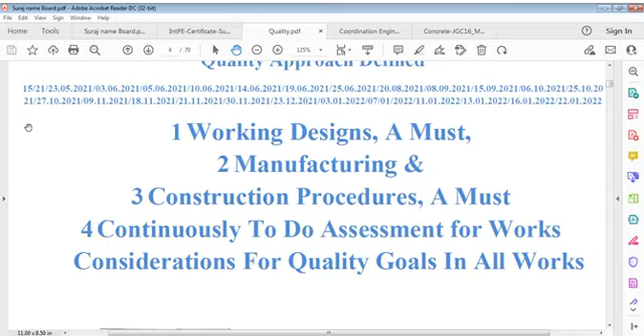You may work on designs, you work on manufacturing or construction procedures, or continuous assessment for works, consideration of quality goals in all works is a must. You cannot say no, and that's very important. We have to fix real quality in Bharat, India, come what may. No excuse for any concessions. Why excuse for concession? No, I don't need any concession.

If I am a good person, I value time, I gather information, and I concentrate on activity. If you don't concentrate on your worksheet or in MS Word or whatever, I'm talking very simply, which everybody does.

If you don't concentrate on calculations, you will miss something, and the worksheet shall give you a different answer. It usually happens - a little disturbance in concentration can lead to something. So when you work in a quality way, you have to think of that, focus on that only.

Work's quality cannot be compromised. There is no way we intend to compromise, just in the name of a fragile system. A system is always fragile because you did it - it's not solid, it's not founded like RCC. It's your own system. You say, I'm going to work this way, you prove this, and it doesn't contravene the quality system. You say, no, this is my way of working, I prove it, I do it.

It doesn't matter, that's all the system you feel, but it may fail because you have not tried it in every respect, and that's what I say. I don't want to go into details of that. So we can only say that I could not find this anywhere - existence of quality and coordination - and that's why there are all red lines, and we'll just go to the coordination file for another way, so I have to jump onto the other one, and that is the concrete file.

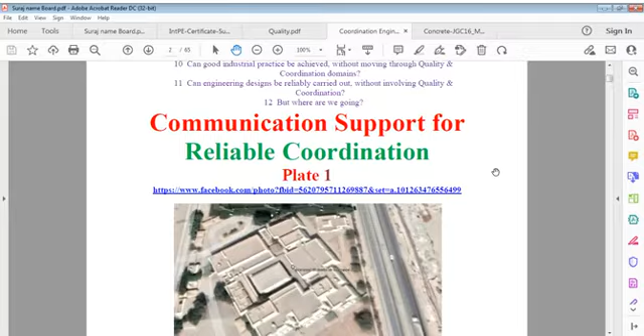So it is now real coordination I'm talking of. It is engineering projects I'm talking of, and public engineers I'm talking of. That's what is important, and we have to see how this works, how it's important. Communication support for reliable coordination - it is all that, and we have to go to specifications, and that's also a very important point we have to spend time on.

Then I'll go to another file also, and that is fabrication of reinforcement. We were talking yesterday about collapse, the system collapsed, and they're going to continue it, and we are somewhere here. Assembly of bars we did, and I think we are on formworks. We did many items of formwork, I think it is 95 somewhere.

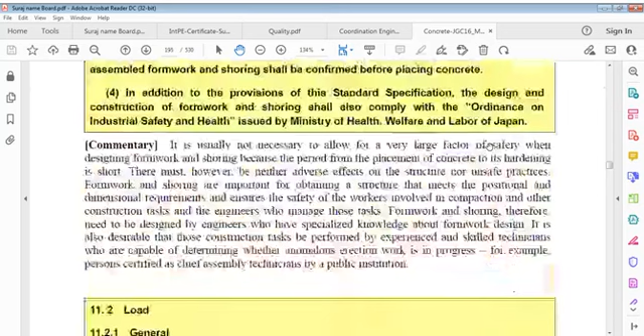Let us see where - yeah, it's formwork. We did formwork, and formwork and shoring the vertical loads we discussed, horizontal loads we discussed, lateral pressure of concrete also we discussed. So I think we will discuss lateral pressure of concrete now, because the formula given - understanding it is very important.

Lateral pressure of concrete - I have to discuss about this in this talk, and let me see what's going on with this. I'll be back in a couple of seconds.

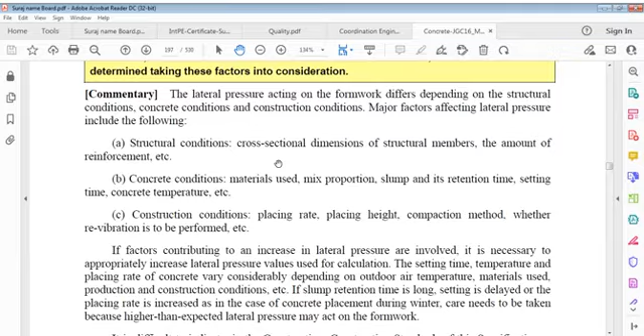What are those factors? Let us see - these factors are structural conditions, concrete conditions, and construction conditions. Structural conditions mean cross section - what is the structure actually, cross sectional dimensions, amount of reinforcement. Concrete conditions are what type of material it is, what's the mix proportion, what is the slump, and what is the retention time, setting time, concrete temperature.

Construction conditions are placing rate, placing height, compaction method - well, it's a question of analysis. These are classified into structural conditions, concrete conditions, construction conditions - experience tells you everything about that. What you deal with means, of course, what type of formwork it is, how congested the steel is, what temperature it is, what mix proportion. In fact, it's only a classification - that is structural conditions, concrete conditions, construction conditions.

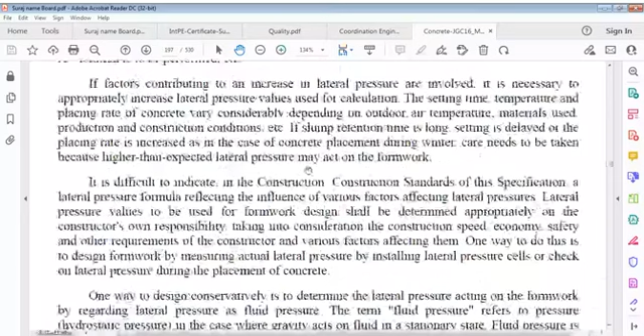If factors contribute to an increase in lateral pressure - how does that increase in lateral pressure happen? If factors contributing to an increase in lateral pressure are involved, it is necessary to appropriately increase lateral pressure values used for calculations.

The setting time, temperature, and placing rate of concrete vary considerably depending on outdoor air temperature, materials used, production and construction conditions. If slump retention time is long, setting is delayed, or placing rate is increased, as in the case of concrete placement during winter, care needs to be taken because higher than expected lateral pressure may act on the formwork.

Lateral pressure values to be used for formwork design shall be determined appropriately on the constructor's own responsibility. That's a very important point. This determination should take into consideration construction speed, economy, safety, and other requirements affecting them.

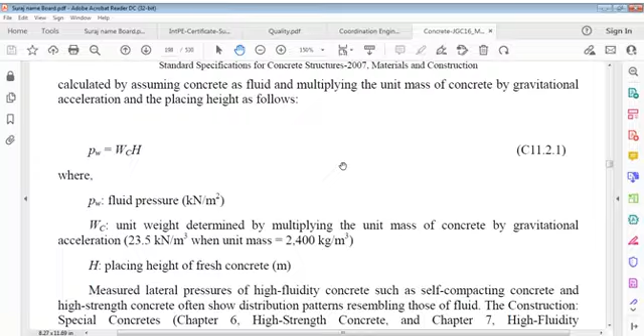This is fluid mechanics, and we say use it. High-fluidity concrete such as self-compacting concrete and high-strength concrete often show distribution patterns resembling those of a fluid.

Special concrete, okay, we'll see that. Therefore, as a general rule, we have to see that design be conducted assuming fluid pressure. If the unit mass of concrete has been determined, it may be substituted into the equation.

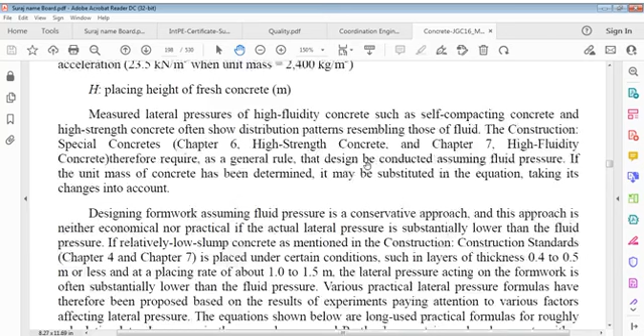Now design, rather than fluid pressure. If relatively low slump concrete is mentioned in construction standards, placed under certain conditions, such as a layer thickness of 0.4 to 0.5 meter or less and a placing rate of about 1 to 1.5 meter, the lateral pressure acting on formwork is often substantially lower than fluid pressure.

Various practical lateral pressure formulas have therefore been proposed based on experimental results, paying attention to various factors affecting lateral pressure. The equations shown below are long-used practical formulas for roughly calculating lateral pressure in cases where normal Portland cement is used and concrete with a slump of about 10 cm, or 100 mm or less, is poured into formwork and compacted using internal vibrators.

So let us see. In view of the experiment conditions under which these formulas were derived, I can say the upper limit of values calculated from the formula is 150 kilonewton per meter square for columns, and 100 kilonewton per meter square for walls.

Because these formulas do not consider final placing height, calculated lateral pressure values may become greater than fluid pressure values depending on placing rate, concrete temperature, and final placing height. Since the maximum value of lateral pressure is usually not greater than fluid pressure, fluid pressure is used when the calculated value exceeds it. In the case of walls, there are no significant differences from the lateral pressure of a column, so the formula for columns may also be used for walls.

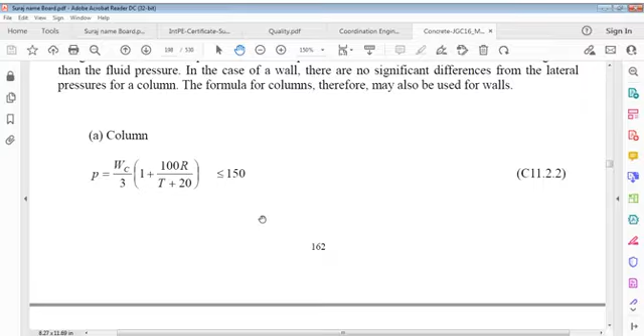So let's say what it says. The formula is P equal to WC divided by 3, bracket 1 plus 100R over T plus 20, less than or equal to 150. Let us see what this means: this is for columns, and for walls where R is greater than or equal to 2 meters per hour, P is equal to WC over 3.

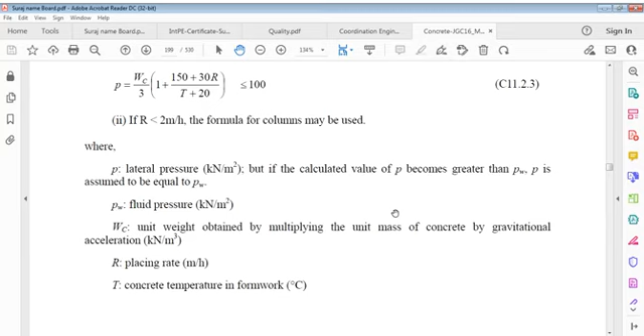Where P is lateral pressure in kilonewton per meter square, but if the calculated value of P becomes greater than PW, P is assumed to be equal to PW. Now PW is fluid pressure in kilonewton per meter square. WC is the unit weight obtained by multiplying the unit mass of concrete by gravitational acceleration, in kilonewton per meter cube. R is the placing rate in meters per hour, and T is the concrete temperature in the formwork, in degrees Celsius.

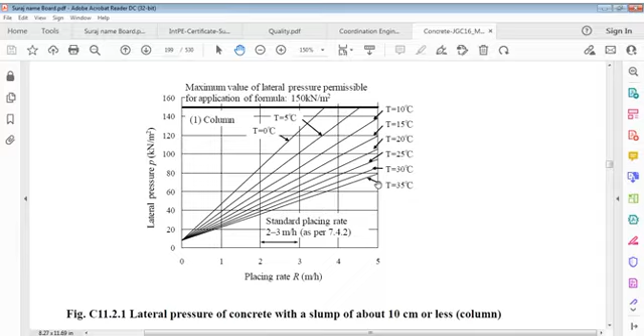That's the only way. This is indicative, meaning you can't rely on this information completely. You can check out your own and find your own formula. You have to use that formula yourself, and that may be way better.

Lateral pressure of concrete with slump about 10 centimeter or less. Now going back to the other one, this is lateral pressure of concrete slump about 10 centimeter or less, and it's the same formula, same wall maximum. This is for wall, and that was for column. That's the only difference.

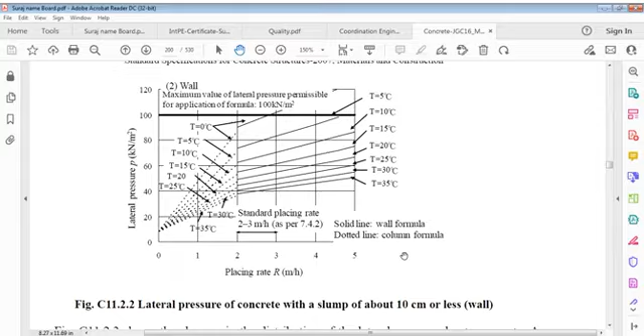You can see the difference here, and here 1, 2, 3 means these are different temperatures, same thing, but the difference you can understand very well. It's just an indicative diagram. You can't say it's exactly okay, you can calculate your own depending on that. It's not very difficult because...

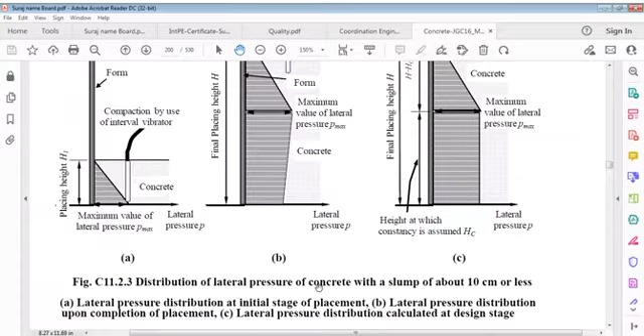Let's see this one. First, it says this figure shows changes in distribution of lateral pressure due to concrete. What are the changes? As indicated by this formula, lateral pressure increases as placing height increases. That's true.

If two or more layers, that is 0.4 to 0.5 meter thick layers of low slump concrete, are placed on top of one another, the increase in lateral pressure is in many cases hampered, especially at locations lower than a certain level, because of decrease in slump of concrete in formwork, progress of setting, bonding with reinforcing bars, etc.

In view of the possibility of such changes, if tall forms are used, formwork is designed assuming that lateral pressure is constant below a certain height. This assumption is based on the fact that the formula for calculating lateral pressure from placing rate and concrete temperature does not include a term for placing height. Calculated lateral pressures remain constant, so formwork is designed assuming the calculated lateral pressure's maximum value.

I'll show you one file later on because I have to find that file, the real file I got. This is just for reference. It says here, in A, maximum value lateral pressure.

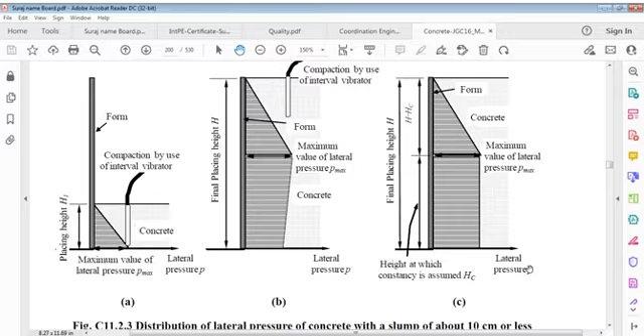Here this is zero pressure, here's the triangle, this is initial height, and when you raise height, you can see this shift for some portion, down also less. And if you say the height at this constant is lateral pressure, it's a final height, and this is final lateral pressure. So the same thing formed here, and likewise you can consider it.

It's up to you. Lateral pressure distribution at the initial stage of placement is A, B is lateral pressure distribution upon completion of placement, and C is lateral pressure distribution calculated at the design stage.

Now let's say construction standards of this specification specifies a method for determining appropriate, let me see, something is better than nothing, I can say that, that's all. What to do otherwise? Tell me, I'm helpless like you are helpless.

So we can say construction standards of this document give a method to determine appropriate minimum slump for placement, considering concrete structure and reinforcement conditions.

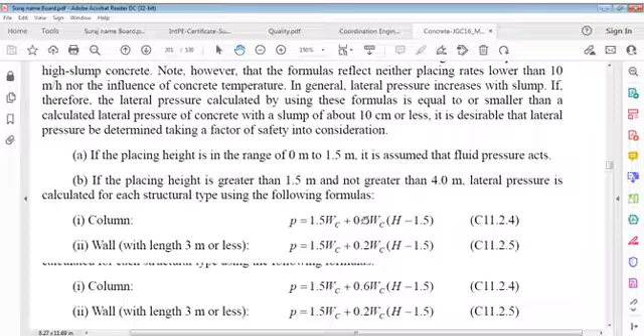Let's read first what it says. Figure C11.2.4 shows distributions of lateral pressures calculated by using the formulas. These distributions can be used as reference data when considering lateral pressure of high slump concrete.

However, these formulas reflect neither placing rates lower than 10 meters per hour nor the influence of concrete temperature. In general, lateral pressure increases with slump.

Therefore, if lateral pressure calculated by using these formulas is equal to or smaller than the calculated lateral pressure of concrete with a slump of about 100 mm, it is desirable that lateral pressure be determined taking a factor of safety into consideration.

If placing height is in the range of 0 to 1.5 meters, it is assumed that fluid pressure acts of course at 1.5 meters. If placing height is greater than 1.5 meters and not greater than 4 meters, lateral pressure is calculated for each structural type using the following formula.

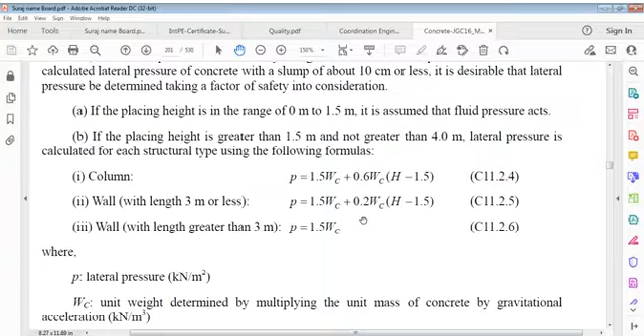This is the general trend line lower. p is lateral pressure and WC is unit weight of concrete, multiplying unit mass of concrete by gravitational acceleration. Placing height is H.

That's what it says. Just to understand, if this is fluid pressure, we can say this is like an empirical formula, no set formula.

Special loads, what are these? We have to study about special loads, and we are gradually moving towards more and more understanding of concrete. Well, this is a concrete subject. I again try to suggest this is not my specification, this is not our country's specification, this is from Japan, and because these people have of course calculated this, I'm finding it in this specification. I could not find all this in other specifications, particularly from Qatar even. But let us see, we have to understand, we have to get, after all we are in concrete, we are in engineering, we have to learn very many issues.

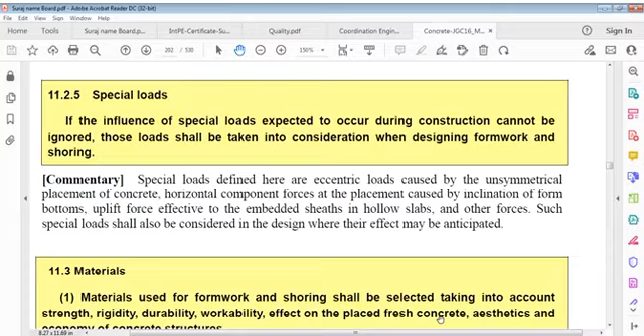Special loads: if the influence of special loads expected to occur during construction cannot be ignored, those loads shall be taken into consideration when designing formwork. Special loads defined here are eccentric loads.

Special loads are defined as eccentric loads caused by unsymmetrical placement of concrete, horizontal component forces at placement caused by inclination of form bottoms, and uplift forces effective to embedded sheaths in hollow slabs. Other forces such as special loads shall be considered in design where their effect may be anticipated.

Now, what materials? Materials used for formwork and shoring shall be selected taking into account strength, rigidity, durability, workability, effect on placed fresh concrete, aesthetics, and economy of concrete structures. Materials such as timber, plywood, and steel plate used for formwork should meet requirements of relevant standards.

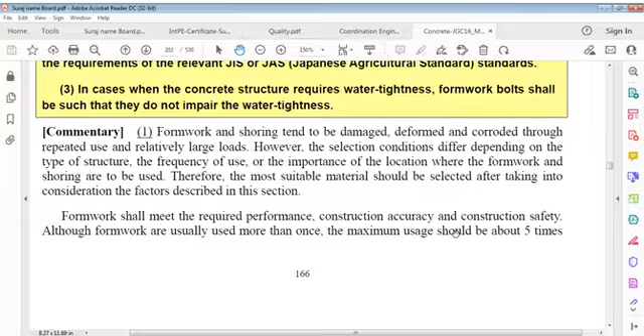Although formworks are usually used more than once, plywood can typically be used about 5 times, plastic forms about 20 times, and steel forms about 30 times. But remember, makeup is important here. As many times as you use it, you have to make it up again and again, and that's a very important part.

Again, it says that there are specifications for pipe support, steel panel for formwork, and plywood for concrete formwork.

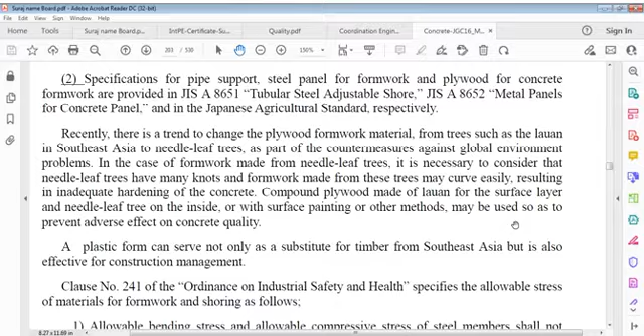Recently, there's a trend to change plywood formwork material from trees such as the lauan in Southeast Asia to needle leaf trees as part of countermeasures against global environmental concerns. In the case of formwork made from needle leaf trees, it is necessary to consider that these trees have many knots, and formwork made from them may curve easily, resulting in inadequate hardening of concrete. Compound plywood made with lauan for surface layers and needle leaf tree on the inside, or with surface painting or other methods, may be used to prevent adverse effects on concrete quality. A plastic form can serve not only as a substitute for timber from Southeast Asia but is also effective for construction management.

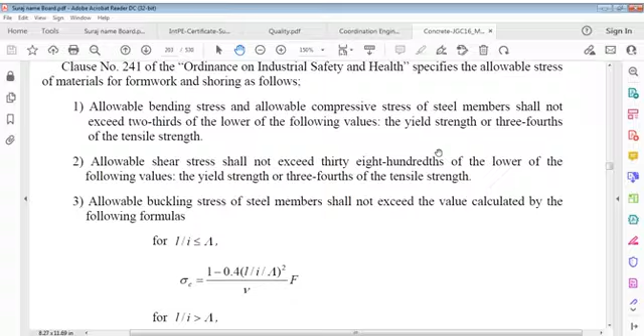Now let us discuss the ordinance on industrial safety regarding allowable stress of materials. Allowable permissible bending stress and allowable compressive stress of steel members shall not exceed two-thirds of the lower of the following values: yield strength, or three-fourths of tensile strength. Allowable shearing stress shall not exceed 38 hundredths of the lower of the following values: yield strength, or three-fourths of tensile strength.

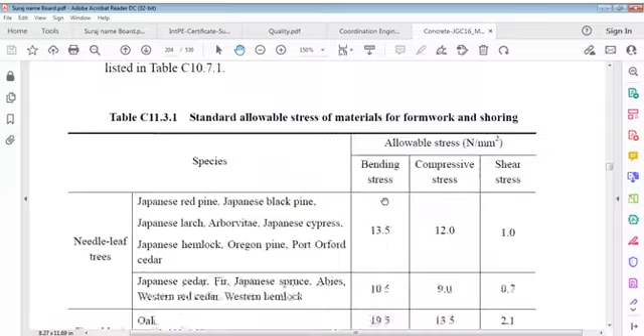Just as a reference, if you go to this specification, you can find the standard allowable stresses of materials for formwork and shoring. It lists species, then allowable stresses: bending stress, compressive stress, and shear stress. Species include Japan red pine, Japan black pine, Japanese larch, Arborvitae, Japanese cypress, Japanese hemlock, Oregon pine, Port Orford cedar, Japan cedar, fir, Japanese spruce, Abies, and Western red cedar. These are needle leaf trees, and bending stress is 13.5, or in some cases 10.5; compressive stress is 12, or in other cases 9; and shear stress is 1, or in other cases 0.7.

Broadleaf trees, oak and chestnut tree, Japanese oak, beech, etc. So these are stresses given here. Allowable buckling stress of timber parallel to the grain shall not exceed these values. So we can go through these.

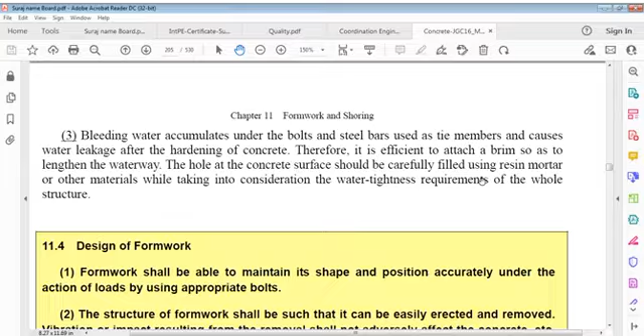Now, the important point is procedure. Let's see. Bleeding water accumulates under bolts and steel bars used as tie members and causes water leakage after hardening of concrete. It's efficient to attach a brim so as to lengthen the waterway. Holes at the concrete surface should be carefully filled using resin mortar or other materials while taking into consideration water tightness requirements of whole structure. Design of formwork.

Formwork design is a very important factor because it is formwork that's going to resist forces from concrete. Formwork shall be able to maintain its shape and position accurately under action of loads by using appropriate bolts. Structure of formwork shall be such that it can be easily erected and removed. Vibration or impact resulting from removal shall not adversely affect concrete.

Structure of formwork shall be such that it can be easily erected and removed. Vibration or impact resulting from removal shall not adversely affect concrete. Joints in sheathing or form panel should, as much as possible, be at right angles or parallel to member axis and be sealed to prevent mortar from leaking. Even if not specified, formwork should be designed to incorporate chamfers at all corners.

It's a very important point. Even if it is not specified, formwork should be designed to incorporate chamfers at all corners. If necessary, temporary openings shall be provided at appropriate positions in formwork to facilitate cleaning, inspection, and placement of concrete.

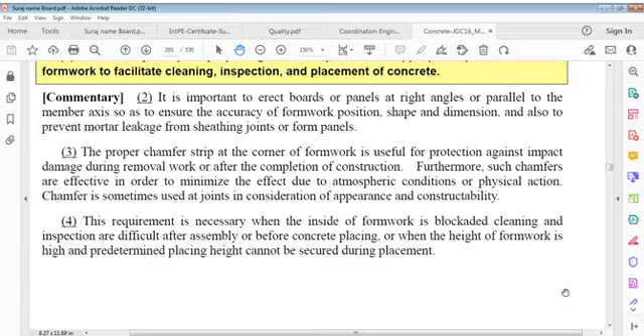Shoring shall be appropriately designed to ensure that all loads acting on it are transmitted to the foundation. Shoring shall be easy to erect and remove, with joints and connections being appropriately designed to carry all loads. Foundations of shoring shall be such that excessive and differential settlement does not occur. Additional measures to appropriately raise shoring shall be provided to offset any settlement and/or deformation during or after placing of concrete. It is necessary for shoring members to stabilize supports using sufficient lateral or diagonal bracing so as to possess sufficient strength and to be safe against buckling under vertical loads.

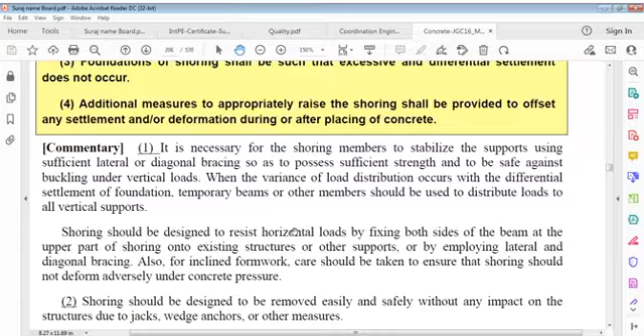When variance of load distribution occurs with differential settlement of foundation, temporary beams or other members should be used to distribute loads to vertical supports. Shoring should be designed to resist horizontal loads by fixing both sides of beam and upper part of shoring onto existing structures or other supports, or by employing lateral and diagonal bracing. Also, for inclined formwork, care should be taken to ensure that shoring does not deform adversely under concrete pressure.

Shoring should be designed to be removed easily and safely without causing any impact on the structure, using jacks, wedge anchors, or other measures. For load transmission at junctions, it is effective to firmly fix supports using butt joints or plug joints, and connections and intersections between steel materials using metal devices such as bolts and clamps. Beams of considerable height should be connected together with lateral bracings to prevent rotation and collapse.

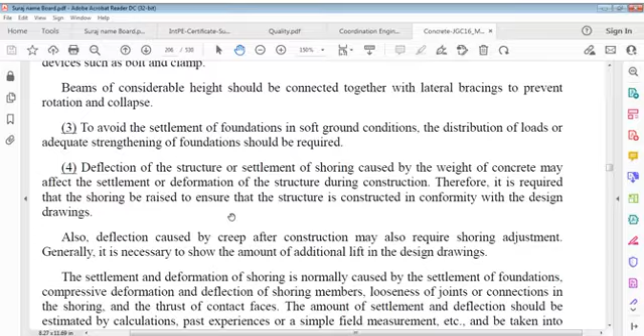Also, deflection caused by creep after construction may also require shoring adjustments. Generally, it is necessary to show the amount of additional lift in design drawings.

Settlement and deformation of shoring is normally caused by settlement of foundations, compressive deformation and deflection of shoring members, loosening of joints or connections in shoring, and thrust of contact faces. The amount of settlement and deflection should be estimated by calculations, past experiences, or simple field measurement, and be taken into consideration in construction.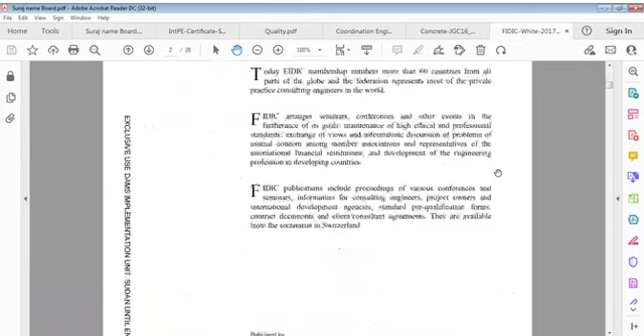Now, before going to that one, I'd like to look at another file that's also important for us. That is the FIDIC White Book, the FIDIC file for designs, which is a client and consultant model services agreement from FIDIC. It's of course an important one. This file is for consultants, for designers. It's from FIDIC, but I'm just showing you how it works. I'm not going to read all of it.

Only the index in this case: general conditions, that is definitions and interpretation about definitions of provisions, obligation of consultant, scope of services, normal, additional and exceptional services, duty of care and exercise of authority, client's property. Meanwhile I should put a barrier here so that we know what we are talking about.

We're talking about consultants and owners relations. We are talking about that, and that's very important. As I said, definitions, interpretations, and scope of services, normal, additional, and exceptional services, duty of care and exercise of authority, client's property and information regarding obligation of client, that is information, decisions, assistance, equipment and facilities, client's personnel, services of others.

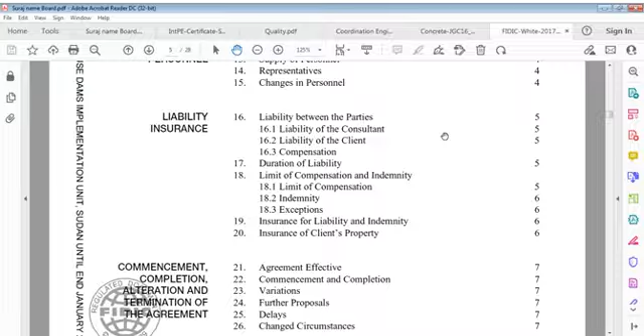In personnel: supply of personnel, representatives, changes in personnel, and then liability insurance, liability between parties, liability of consultant and liability of client, compensation, then duration of liability, limit of compensation and indemnity, limit of compensation, indemnity, exceptions, insurance for liability and indemnity, insurance of client's property, then commencement, completion, alteration and termination of agreement, agreement effective, commencement and completion.

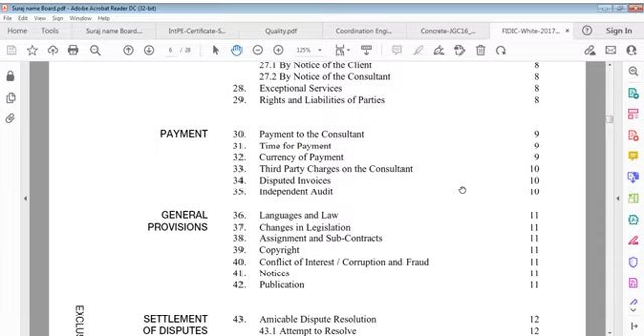Variations, further proposals, delays, changed circumstances, abandonment, suspension or termination by notice of client, by notice of consultant, exceptional services, rights and liabilities of parties, payment to consultant, time for payment, currency of payment, third-party charges on consultant, disputed invoices, independent audit, general provision, languages and law, changes in legislation, assignment and subcontracts, copyright.

Conflict of interest, corruption and fraud, notices, publication, settlement of disputes, amicable dispute resolution, attempt to resolve, referral to mediator, appointment of mediator, agreement of program, written agreement to be binding, non-binding opinion, costs of mediation, failure of mediation, arbitration.

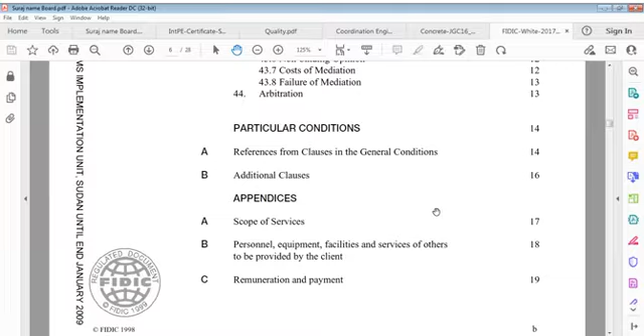Particular conditions, reference from clauses in general condition, additional clauses and appendices, scope of services, personnel, equipment, facilities and services to be provided by client, remuneration and payment, and then agreement.

What is agreement? The language is very simple. This agreement made on this day of is between this and this. Hereinafter called consultant, that's called client. Client is the first party, consultant is the second party. Whereas client desires that certain services should be performed by consultant, namely whatever, and has accepted a proposal by consultant for performance of such services.

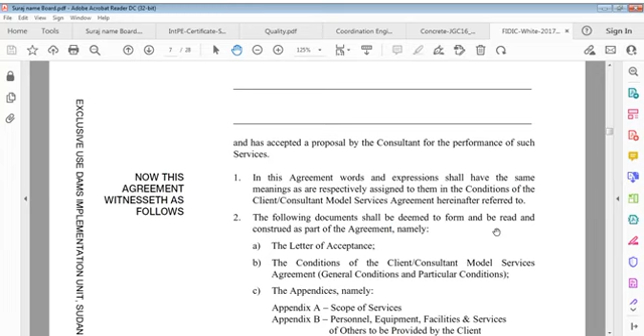And what are those services? In this agreement, words and expressions shall have the same meanings as are respectively assigned to them in the conditions of the client consultant model services agreement, hereinafter referred to. The following documents shall be deemed to form and be read and construed as part of the agreement, namely letter of acceptance, conditions of client consultant model services agreement, general conditions and particular conditions, appendices, namely Appendix A, scope of services, Appendix B.

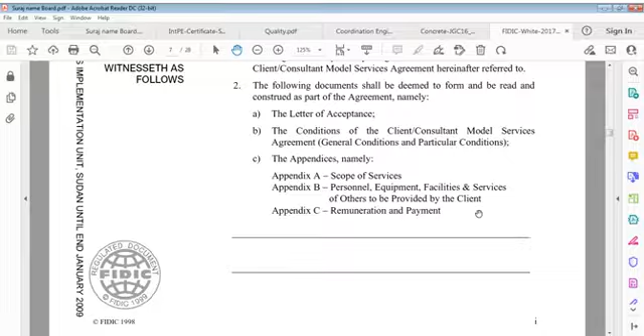Appendix B, personnel, equipment, facilities and services of others to be provided by client, Appendix C, remuneration and payment. And then, in consideration of payments to be made by client to consultant as hereinafter mentioned, the consultant hereby agrees with client to perform services in conformity with provisions of the agreement. Client hereby agrees to pay consultant in consideration of performance of services such amounts as may become payable under provisions of the agreement at times and in the manner prescribed by the agreement.

In witness whereof the parties hereto have caused this agreement to be executed this day and year first before written, in accordance with their respective laws. Authorized signature of client in the presence of name, signature, address of witness, and authorized signature of consultant in presence of name, signature, address of witness.

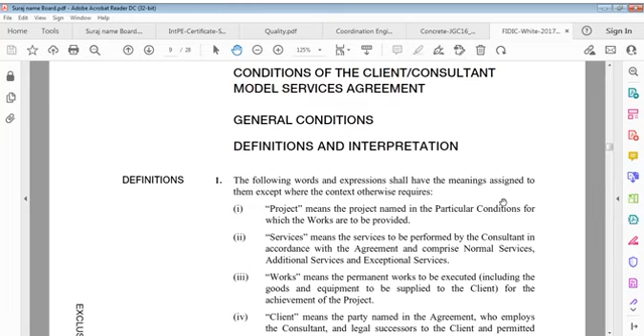And then conditions. I've just tried to refer to this for the time being, and we will see. We'll just move on through the pages only because it's not something I'm going to detail today. We'll take it up, because as you can see, it's not very long, very small, but we come back to it again.

Let me go back to that. Just for information, this is how it should move on, because this is your consultant, and you should know about your legal position, how it works, and that will predict things. So that's what I'll take back.

We move on now to preparation of formwork, which is very important. We don't want to miss something here. Let's see how the signals are performing, about one hour more. Formwork should be secure, you know that.

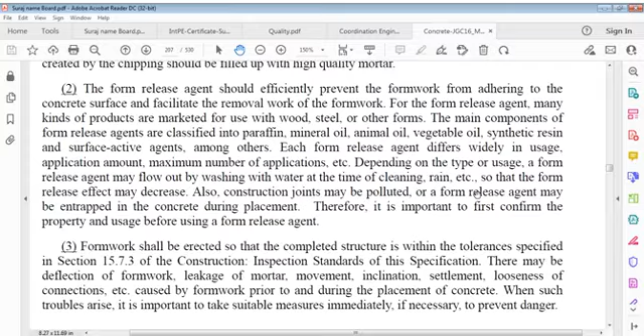Each form release agent differs widely in uses, application amount, maximum number of applications, etc., depending on type of usage. Depending on the type of use, a form release agent may flow out by washing with water at the time of cleaning, rain, etc., so that the form release effect may decrease. Also, construction joints may be polluted, or a form release agent may be entrapped in concrete during placement. Therefore, it is important to first confirm the property and uses before using a form release agent.

Formwork shall be erected so that the completed structure is within the tolerances in the inspection standards of these specifications. There may be deflection of formwork, leakage of mortar, movement, inclination, settlement, or looseness of connections caused by formwork prior to and during placement of concrete. When such troubles arise, it is important to take suitable measures immediately, if necessary, to prevent danger.

Preparation of shoring. Shoring shall be prepared in a manner that ensures sufficient strength and stability. Dimensions of shoring and whatever defects therein shall be appropriately managed prior to and during placing of concrete.

Placing of concrete. In order to provide sufficient strength and stability for shoring, prior to shoring erection, adequate preparation and strengthening of ground should be completed so as to provide required bearing capacity or to avoid differential settlement. Sufficient compaction should be applied to backfilled soil when it is used as foundation material.

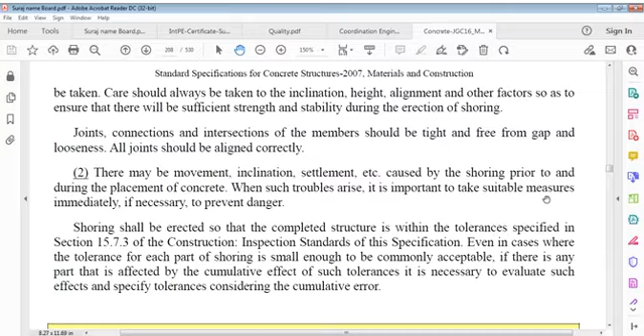Joints, connections and intersections of members should be tight and free from gap and looseness. All joints should be aligned correctly. There may be movement, inclination, or settlement caused by shoring prior to and during placement of concrete. When such trouble arises, it is important to take suitable measures immediately, if necessary, to prevent danger. Shoring shall be erected so that the completed structure is within the tolerances specified.

Even in cases where tolerance for each part of shoring is small enough to be commonly acceptable, if there is any part affected by the cumulative effect of such tolerances, it is necessary to evaluate such effects and specify tolerances considering a cumulative error.

Removal of formwork and shoring shall not be removed until concrete has achieved sufficient strength to carry its own weight and whatever loads are superimposed during the course of further construction. The timing and sequence of removal shall be determined taking the strength of concrete, structure type and importance, member types and dimensions into account.

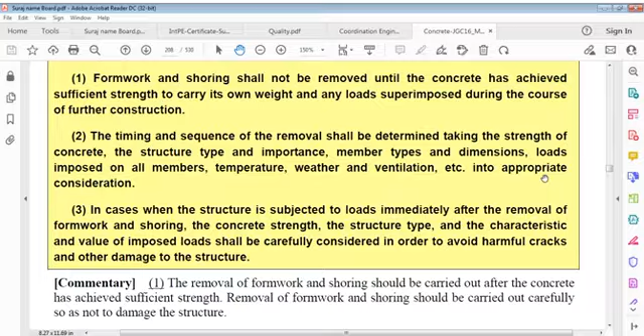Loads imposed on all members, temperature, weather and ventilation should be taken into appropriate consideration. In cases when structure is subject to loads immediately after removal of formwork and shoring, concrete strength, structure type and characteristics, and value of imposed loads shall be carefully considered in order to avoid harmful cracks and other damage to the structure.

Removal of formwork and shoring should be carried out after concrete has achieved sufficient strength, and should be carried out carefully so as not to damage the structure. Timing of removal should be determined considering compressive strength of concrete.

Specimens should be cured under the same conditions as the actual structure. Since specimens tend to be influenced by outside temperature or dryness, it is desirable to judge the timing of removal based on the curing method, in consideration of these effects.

It is difficult to provide general criteria for removal time of formwork and shoring because various factors greatly influence removal time, and many construction accidents can be attributed to erroneous judgment of removal time. Sufficient consideration is required for removal of formwork.

A table is given here providing suggested compressive strengths for determination of removal time of formwork for RC structures, when the total load acting on the structure consists almost entirely of dead load. A longer period of curing may be required, and even after the compressive strength is achieved and formwork is removed, wet curing needs to be continued for a period.

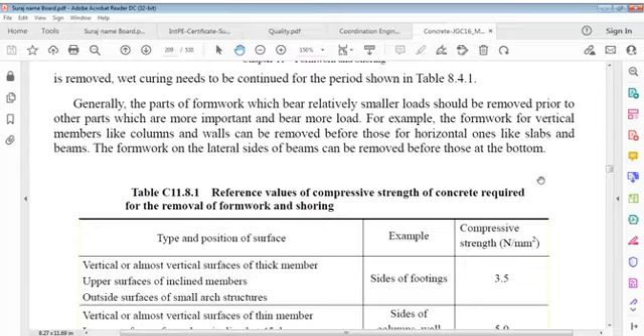As reference only, not mandatory, reference values of compressive strength of concrete required for removal of formwork and shoring are given, along with type and position of surface. For vertical or almost vertical surfaces of thick members, upper surfaces of inclined members, outside surfaces of small arch structures, and sides of footings, the compressive strength is 3.5 Newton per millimeter square.

For vertical or almost vertical surfaces of thin members, lower surfaces of members inclined at 45 degrees or more, and inside surfaces of small arch structures, sides of columns, walls and beams, the value is 5. For slabs and beams of bridges and buildings, the lower surface of members inclined at 45 degrees or less, bottom of slabs and beams, the inside surface value is 14.

Immediately after removal of formwork, concrete structures may not yet have acquired the specified compressive strength, and the structural system may be different from the one expected in design. Loading may cause harmful cracks or damage to the structure due to excessive stress. Therefore, it should be confirmed that loads imposed immediately after removal of formwork and shoring shall have no harmful effect on the structure.

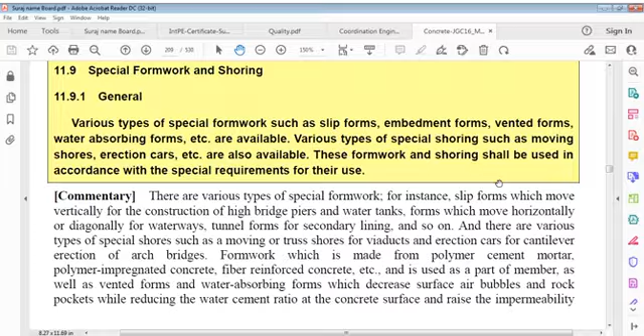There are various types of special formworks, for instance slip forms which move vertically for construction of high bridge piers and water tanks, forms which move horizontally or diagonally for waterways, and tunnel forms for secondary lining, and so on.

There are various types of special shores, such as moving or truss shores for viaducts, and erection cars for cantilever erection of arch bridges. Formwork which is made from polymer cement mortar.

Formwork made from polymer cement mortar, polymer impregnated concrete, fiber reinforced concrete, etc., is used as part of the member, as well as vented forms and water absorbing forms, which decrease surface air bubbles and rock pockets while reducing the water cement ratio at the concrete surface and raise impermeability of the surface part of a structure. These are used in environments where high durability is required. When using vented forms or water absorbing forms for a thin concrete member, it is especially important to delay removal or assure sufficient curing in order to avoid drying at the initial stage. When using such forms, care should be taken to meet special requirements for use.

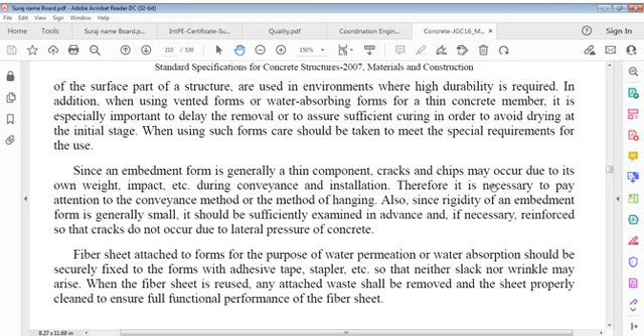Since an embedment form is generally a thin component, cracks and chips may occur due to its own weight impact during conveyance and installation. Therefore, it's necessary to pay attention to the conveyance method or method of hanging. Also, since the rigidity of an embedment form is generally small, this should be sufficiently examined in advance.

If necessary, it should be reinforced so that cracks do not occur due to lateral pressure of concrete.

Fiber sheets attached to forms for the purpose of water permeation or water absorption should be securely fixed to forms with adhesive tape, stapler, etc., so that neither slack nor wrinkle may arise. When a fiber sheet is reused, any attached waste shall be removed and the sheet properly cleaned to ensure full functional performance of the fiber sheet.

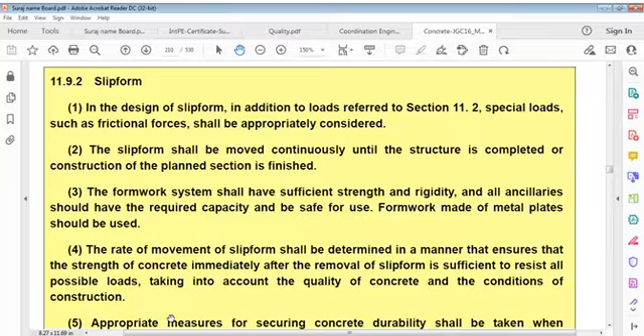Formwork made of metal plates should be used. The rate of movement of the slip form shall be determined in a manner that ensures the strength of concrete immediately after removal of the slip form is sufficient to resist all possible loads, taking into account the quality of concrete and conditions of construction. Appropriate measures for securing concrete durability shall be taken when constructing using a slip form.

When a slip form is used, in addition to loads expected in general construction methods, the following special loads shall be considered: at the top of steel frames or jacking rods during placing of concrete, weight of the deck, friction between concrete and formwork, weight of reinforcing bars temporarily placed on the deck, and weight of concrete acting on the temporary deck or working deck, which can be used as shores of the bottom formwork.

When theoretical loads are difficult to calculate, the design should be based on results from an experiment, unless the safety of the formwork has been proven from previous experience. The formwork system should have sufficient rigidity so as to ensure that deformations of the structure do not exceed tolerances during sliding operations. A yoke is a member like a gate frame.

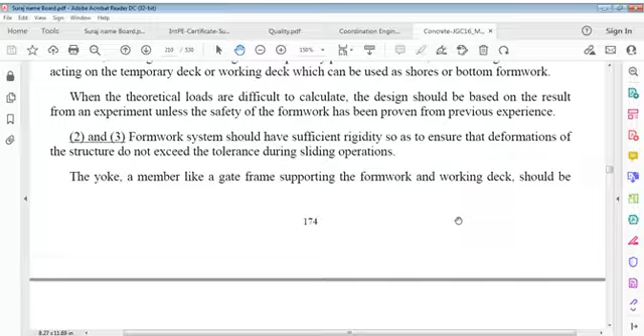Supporting formwork and working deck should be able to resist lateral pressure of concrete and to transmit full weight of shuttering, accessories and decks to jacks. Yoke should also secure adequate clearance to enable embedded material to be located correctly prior to being embedded in rising concrete.

In design of a vertical slip form in which jacks are supported on vertical rods, care should be taken to place jacks in such a manner that vertical loads to each jack are as nearly equal as possible and that capacity of jacks are not exceeded. Jacking system should also provide for precise simultaneous movement of entire form at constant sliding rate.

When placing concrete is interrupted before resuming construction, it is necessary to perform joint treatment. This is necessary in order to prevent a weak point in concrete which may reduce durability performance.

In general, required compressive strength of concrete immediately after removal of formwork should be more than 2 times larger than stress induced by full load.

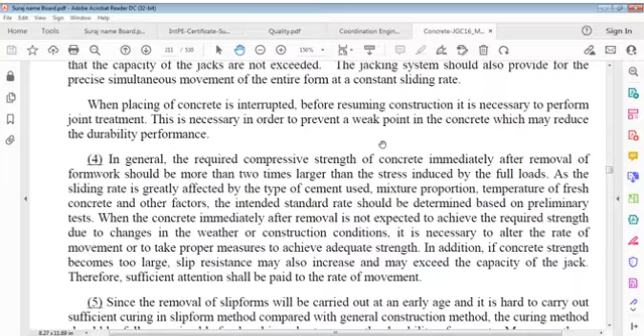When concrete immediately after removal is not expected to achieve required strength due to changes in weather or construction conditions, it is necessary to alter rate of movement or to take proper measures to achieve adequate strength.

In addition, if concrete strength becomes too large, slip resistance may also increase and may exceed capacity of jack. Therefore, sufficient attention shall be paid to rate of movement.

Since removal of slip forms will be carried out at an early age and it's hard to carry out sufficient curing, compared with general construction method, curing method should be fully examined in order to secure durability of concrete. Moreover, there is possibility that wrinkles may arise with movement of slip forms, which will have an adverse impact not only on appearance but also on durability.

When a fault is discovered after movement of slip form, extent of fault shall be evaluated and measures be taken if necessary.

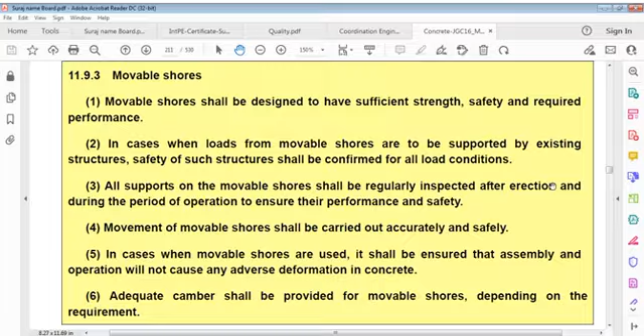Movement of movable shores shall be carried out accurately and safely. In cases when movable shores are used, it shall be ensured that assembly and operation shall not cause any adverse deformation in concrete. Adequate camber shall be provided for movable shores depending on requirement.

Movable shores referred to herein involve movable shores, movable suspended shores, working cars for overhanging erection, movable erection beams, and so on.

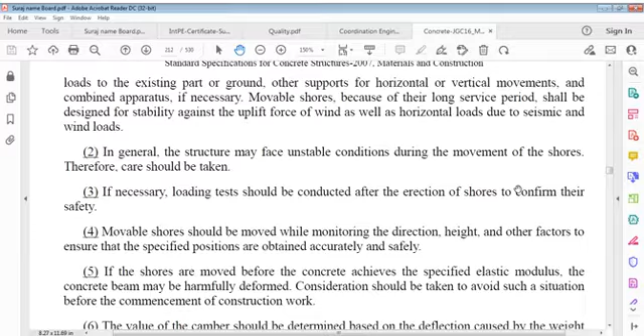In general, structure may face unstable conditions during movement of shores. Therefore, care should be taken. If necessary, loading tests should be conducted after erection of shores to confirm their safety.

Movable shores should be moved while monitoring direction, height, and other factors to ensure that specified positions are obtained accurately and safely. If shores are moved before concrete achieves specified elastic modulus, concrete beam may be harmfully deformed. Consideration should be taken to avoid such a situation before commencement of construction work.

Value of camber should be determined based on deflection caused by weight of concrete and other factors. Especially for pre-stressed concrete beams, camber should be determined considering elastic deformation and creep caused by pre-stressing.

Now, cold weather concreting.

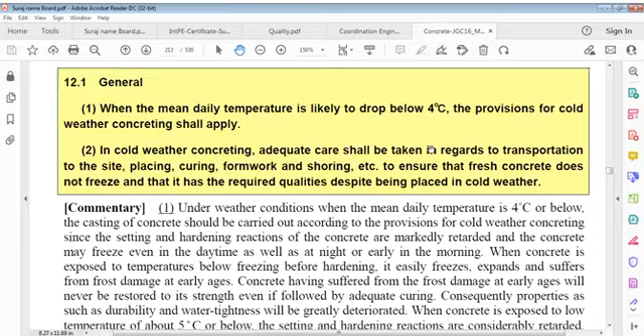Cold weather concrete. When mean daily temperature is likely to drop below 4 degrees Celsius, provisions for cold weather concrete shall apply. That's mean daily, remember - not daily temperature, but mean daily temperature.

In cold weather concreting, adequate care shall be taken in regards to transportation to site, placing, curing, formwork and shoring to ensure that fresh concrete does not freeze and that it has required qualities despite being placed in cold weather.

Under cold weather conditions, when mean daily temperature is 4 degrees Celsius or below, casting of concrete should be carried out according to provisions for cold weather concrete, since setting and hardening reactions of concrete are markedly retarded, and concrete may freeze even in daytime as well as at night or early in morning.

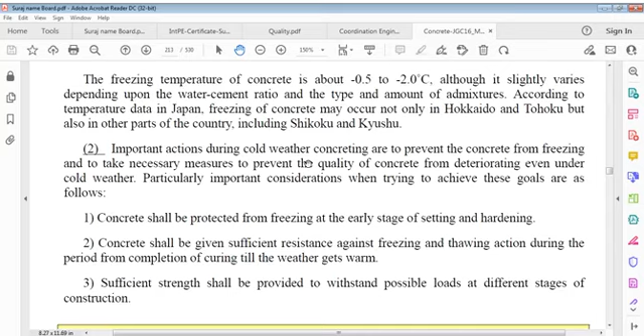Important actions during cold weather concreting are to prevent concrete from freezing and to take necessary measures to prevent quality of concrete from deteriorating even under cold weather. Particularly important considerations when trying to achieve these goals are as follows.

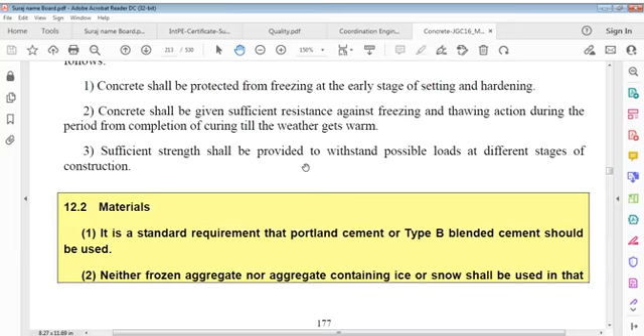Concrete shall be protected from freezing at early stages of setting and hardening. Concrete shall be given sufficient resistance against freezing and thawing action during period from completion of curing till weather gets warm. Sufficient strength shall be provided to withstand possible loads at different stages of construction.

As a standard requirement, Portland cement or type B blended cement should be used. Neither frozen aggregate nor aggregate containing ice or snow shall be used in that state.

Chemical admixture shall be selected so that stable concrete quality can be obtained. Chemical admixtures whose quality is not specified, such as freeze-preventing additives and cold-resistant additives, may be used only when their quality and the quality of concrete made by using such additives are fully verified.

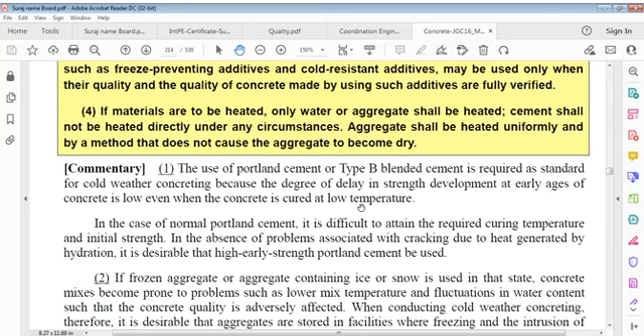If materials are to be heated, only water or aggregates shall be heated. Cement shall not be heated directly under any circumstances. Aggregate shall be heated uniformly and by a method that doesn't cause aggregate to become dry.

You can just wait on this for a few minutes. I'll be back and we'll see what to do with this. I think it's about maybe a little time now, and we'll see how to do it. We'll give it time for this.

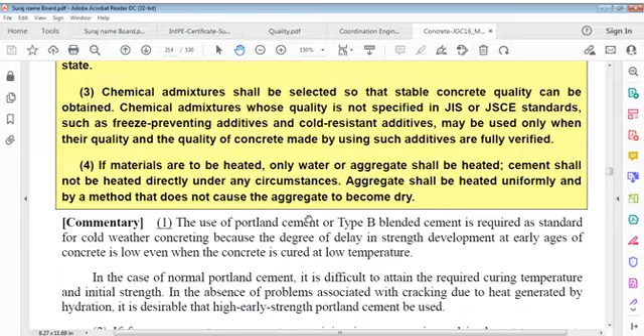We can use chemical admixtures, also selected so that stable concrete quality can be obtained. Chemical admixtures whose quality is not specified, such as freeze preventing additives and cold resistant additives, may be used only when respective quality and quality of concrete made by using such additives are fully verified.

Use of Portland cement - in case it says use of Portland cement or type B blended cement is required as standard for cold weather concreting, because degree of delay in strength development at early ages of concrete is low, even when concrete is cured at low temperature. In case of normal Portland cement, it is difficult to attain required curing temperature and initial strength. In absence of problems associated with cracking due to heat generated by hydration, it is desirable that high early strength Portland cement be used.

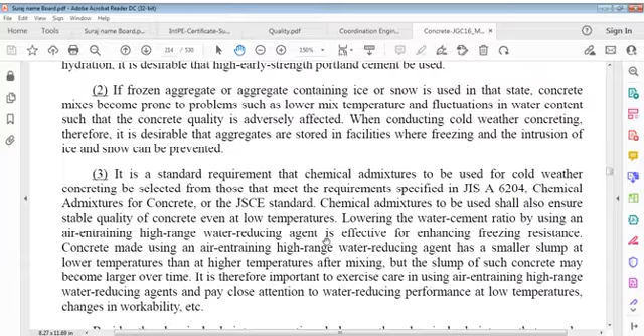Therefore, it is desirable that aggregates be stored in facilities where freezing and intrusion of ice and snow can be prevented. It is a standard requirement that chemical admixtures used for cold weather concreting be selected from those that meet requirements.

Chemical admixtures used shall also ensure stable quality of concrete even at low temperatures. Lowering the water-cement ratio by using an air-entraining high-range water-reducing agent is effective for enhancing freezing resistance.

Concrete made using an air-entraining high-range water-reducing agent has a smaller slump at lower temperatures than at higher temperatures after mixing, but the slump of such concrete may become larger over time. It is therefore important to exercise care when using these agents and pay close attention to water-reducing performance at low temperatures and changes in workability.

Besides the chemical admixtures mentioned, other admixtures that may be used include freeze-preventing and cold-resistant additives, accelerator-type air-entraining water-reducing agents, and accelerators used to speed up strength development. When using these chemical admixtures, careful studies shall be conducted on their composition and effects to ascertain their quality. For liquid chemical admixtures, it is also necessary to take measures to prevent freezing, since segregation occurs when they freeze.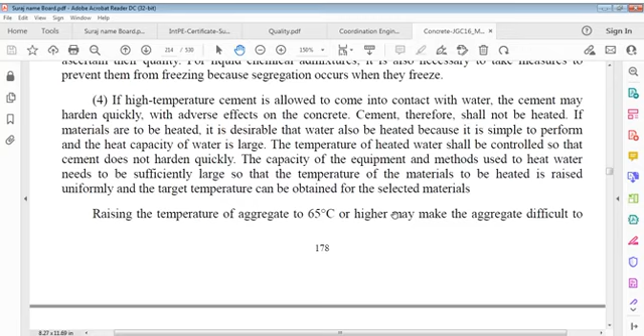The temperature of heated water shall be controlled so that cement does not harden quickly. The capacity of equipment and methods used to heat water must be sufficiently large so that the temperature of materials to be heated is raised uniformly and the target temperature can be obtained for the selected materials.

Raising the temperature of aggregate to 65 degrees Celsius or higher may make the aggregate difficult to handle and cause cement to harden quickly. In general, these problems can be prevented by keeping the temperature of the water-aggregate mixture at or below 40 degrees Celsius. The method of using steam to heat aggregate is relatively easy to control.

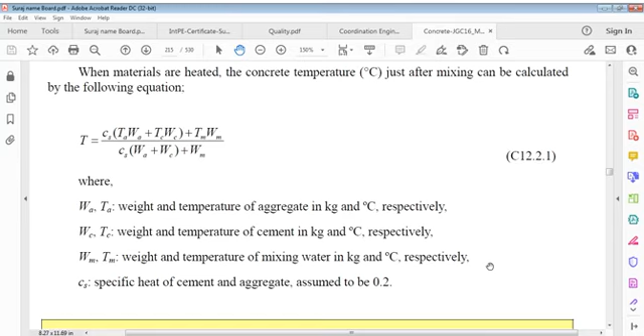When materials are heated, the concrete temperature in degrees Celsius just after mixing can be calculated using the following equation: T equals... where Cs is the specific heat of cement and aggregate, assumed to be 0.2. WA and TA are the weight and temperature of aggregate in kilograms and degrees Celsius. WC and TC are the weight and temperature of cement in kilograms and degrees Celsius. WM and TM are the weight and temperature of mixing water in kilograms and degrees Celsius. This is divided by WA plus WC plus WM, according to the mix proportions.

As a general rule, concrete placed under cold weather conditions should be air-entrained concrete.

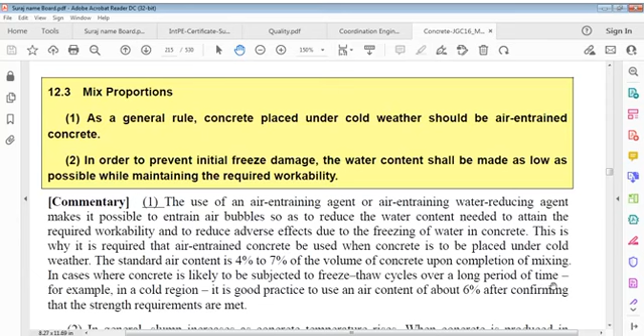As a general rule, concrete placed under cold weather should be air entrained. In order to prevent initial freeze damage, water content shall be made as low as possible while maintaining required workability. Use of an air entraining agent or air entraining water reducing agent makes it possible to entrain air bubbles so as to reduce water content required to attain required workability and to reduce adverse effects due to freezing of water in concrete.

This is why it is required that air entrained concrete be used when concrete is to be placed under cold weather. Standard air content is 4% to 7% of volume of concrete upon completion of mixing.

In cases where concrete is likely to be subject to freeze-thaw cycle over a long period of time, for example in a cold region, it's a good practice to use an air content of about 6% after confirming that strength requirements are met.

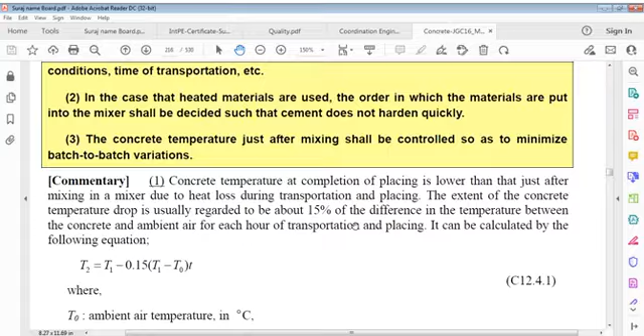It can be calculated by the following equation. Concrete temperature at completion of placing is lower than that just after mixing in a mixer due to heat loss during transportation and placing. The extent of concrete temperature drop is usually 15% of difference in temperature between concrete and ambient air for each hour of transportation and placing. It can be calculated: T2 equals T1 minus 0.15 times T1 minus T0.

T0 is ambient air temperature in degrees Celsius. T1 is concrete temperature just after mixing, which is higher, while ambient temperature is lower. T2 is concrete temperature at completion of placing. So concrete temperature at completion of placing equals concrete temperature just after mixing minus 0.15 times concrete temperature just after mixing minus ambient temperature T0, where T is time from mixing to completion of placing in hours. Therefore, concrete temperature at mixing requires to be the sum of required placing temperature and heat loss during transportation and placement.

In selection of ready mixed concrete plants, consider that cement may harden quickly if high temperature water comes into contact with cement. A recommended procedure therefore is to put heated water and coarse aggregate, then fine aggregate into mixer, and finally, after temperature of materials in mixer becomes 40 degrees Celsius or lower, put cement into mixer.

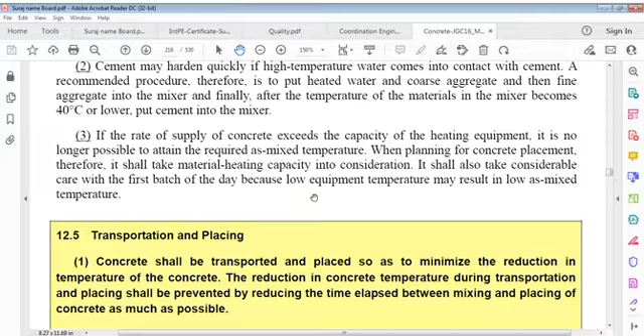If rate of supply of concrete exceeds the capacity of heating equipment, it's no longer possible to attain required as-mixed temperature. When planning for concrete placement, therefore, it shall take material heating capacity into consideration. Shall also take considerable care with first batch of the day, because low equipment temperature may result in low as-mixed temperature.

Transporting and placing: concrete shall be transported and placed so as to minimize reduction in temperature of concrete. Reduction in concrete temperature during transportation and placing shall be prevented by reducing time elapsed between mixing and placing of concrete as much as possible.

Temperature of concrete at placement shall be in the range of 5 to 20 degrees Celsius, considering cross-sectional dimensions of structure and weather conditions.

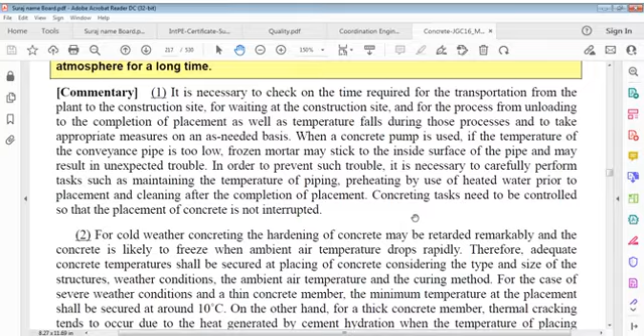Concreting tasks require control so that placement of concrete is not interrupted. For cold weather concreting, hardening of concrete may be retarded remarkably, and concrete is likely to freeze when ambient air temperature drops rapidly. Therefore, adequate concrete temperature shall be secured at placing of concrete, considering the type and size of structures, weather conditions, ambient air temperature, and curing method.

For cases of severe weather conditions and thin concrete members, the minimum temperature at placing shall be secured at around 10 degrees Celsius. This is for the case of severe weather conditions and thin concrete members.

On the other hand, for a thick concrete member, thermal cracking tends to occur due to heat generated by cement hydration when the temperature of placing concrete becomes higher. Therefore, temperature at placement of concrete may be controlled at 5 degrees Celsius or slightly higher for thick concrete members.

When temperature is overly high, unit water content normally increases and the hardening process of concrete is accelerated, resulting in a decrease of strength at a later stage.

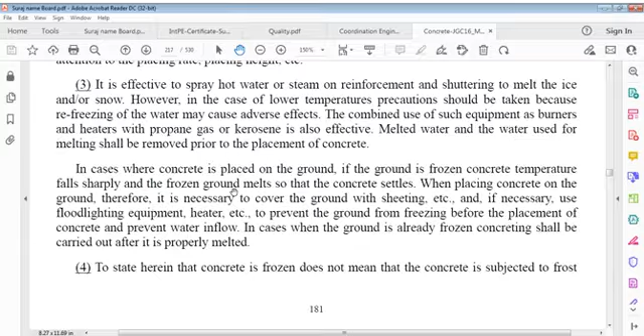To state herein that concrete is frozen doesn't mean that concrete is subject to frost damage, but just describes the state of concrete. It's likely that the temperature of the concrete surface may rapidly drop during the elapsed time between completion of placing and start of curing.

Therefore, concrete surface shall be covered immediately after placing. An appropriate material such as plastic sheet is especially important to protect concrete surface from wind. Curing.

Curing. Method and duration of curing shall be decided considering such factors as ambient air temperature, mixed proportions, and type and size of structures. Curing is a very important item for concrete production, and that's why we have to be very serious about this issue.

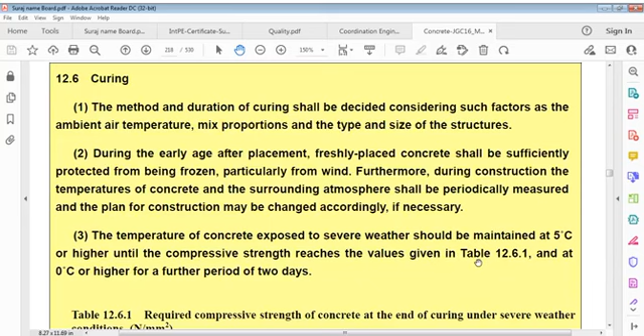Temperature of concrete exposed to severe weather should be maintained at 5 degrees or higher until compressive strength reaches the values given in Table 12.6.1.

There is a required compressive strength of concrete at the end of curing under severe weather conditions. Exposure conditions: thin, ordinary, thick. For portions continuously or frequently saturated with water, thin member requires 15, ordinary requires 12, and thick requires 10 - so thick needs less temperature, ordinary needs more, and thin needs even more. For portions exposed to ordinary weather conditions other than that, it is possible to have 5 for thin, 5 for ordinary, and 5 for thick.

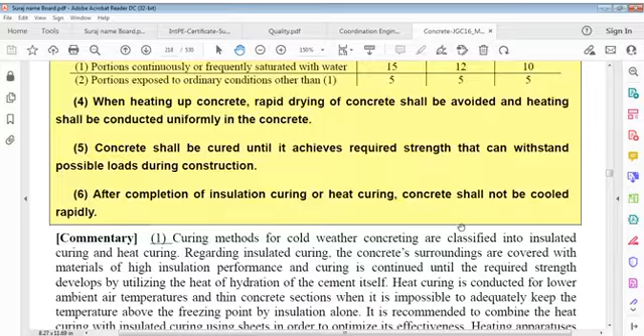Curing methods for cold weather concreting are classified into insulated curing and heat curing. Regarding insulated curing, concrete's surroundings are covered with materials of high insulation performance, and curing is continued until the required strength develops by utilizing the heat of hydration of the cement itself.

Heat curing is conducted for lower ambient air temperatures and thin concrete sections when it is impossible to adequately keep temperature above freezing point by insulation alone.

It is recommended to combine heat curing with insulated curing using sheets in order to optimize its effectiveness.

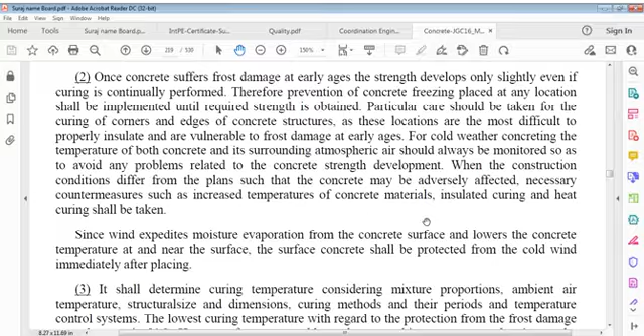Since wind expedites moisture evaporation from concrete surface and lowers concrete temperature at or near surface, surface concrete shall be protected from cold wind immediately after placing. We shall determine curing temperature considering mixture methods and lowest curing temperature with regard to protection from frost damage.

Curing shall be continued until further strength development is achieved. Concrete strength necessary to withstand frost damage at end of curing depends on factors such as weather conditions.

It's a very important point that concrete, in case of wet concrete, continuously subject to severe weather conditions, curing shall be continued until further strength development is achieved. Concrete strength necessary to withstand frost damage at end of curing depends on factors such as weather conditions, size of members, and exposure conditions. Standard concrete strength is provided in table according to classification prescribed therein.

These strength values are for prevention of concrete under rapid cooling. It has been concluded that mixture proportions and curing temperature affect curing period necessary to achieve strength.

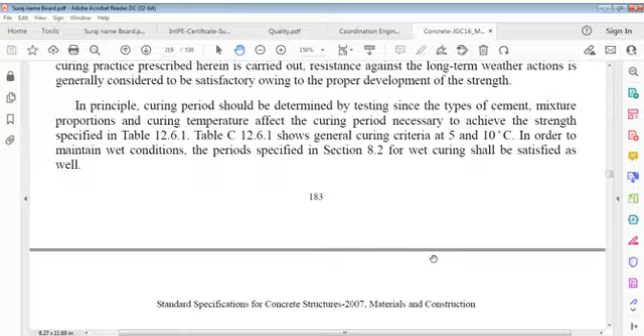The mixture proportions and curing temperature affect curing period necessary to achieve strength. General curing criteria is 5 and 10 degrees Celsius in order to maintain wet conditions. Period specified shall be satisfied as well.